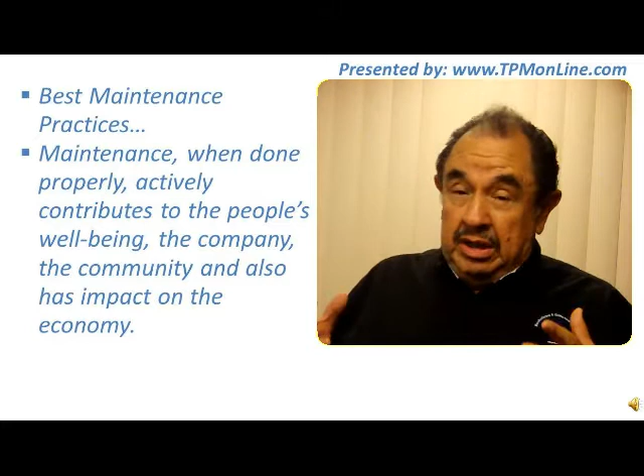Maintenance is a wonderful activity. Maintenance can be so important because it contributes to the good operation of a business, contributes to the good economy of a company, the good economy of the community, and finally the good economy of the country. So it is critical that we do a very good maintenance if we are into it.

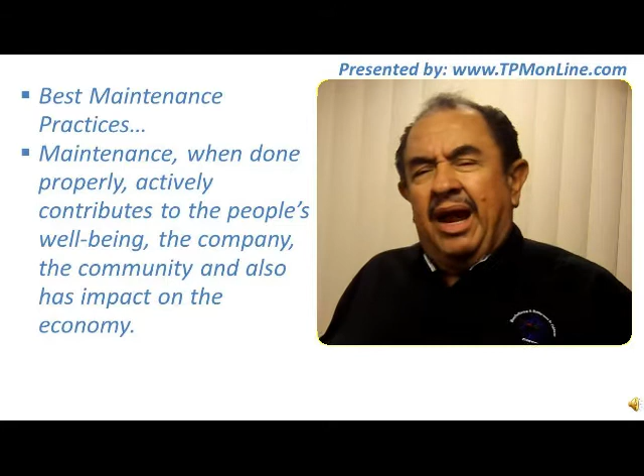Now, we will start this series of recommendations of the best practices because in reality sometimes we utilize the wrong tools, we utilize the wrong techniques, and then the results are not really so good, not as good as we would like them to be. So let us take some notes here of anything that you find that you were probably not sure or aware of.

Now, we will start with these recommendations, and I will try to be as objective as possible because the more objective I can be, the better for all of us. So let us begin with one principle in mind.

Do we really love maintenance? Do we love our profession? Because if we don't, we probably should be thinking of something else, really. Love in our job is shown by doing it right, or even better if possible, okay? Now, if we really think that this is the profession of our life, then let us do it really good. Let us do it in a very professional manner.

Now, let us be careful about our way of communicating with other people. Sometimes there is not enough quality in our communication with people. Perhaps sometimes we are not as clear when we communicate. Perhaps sometimes we're not as respectful as we should when we communicate. So this is critical. One of the first things that we need to do to be good professionals in maintenance is to have good communication skills. Let us constantly look for opportunities to improve those skills.

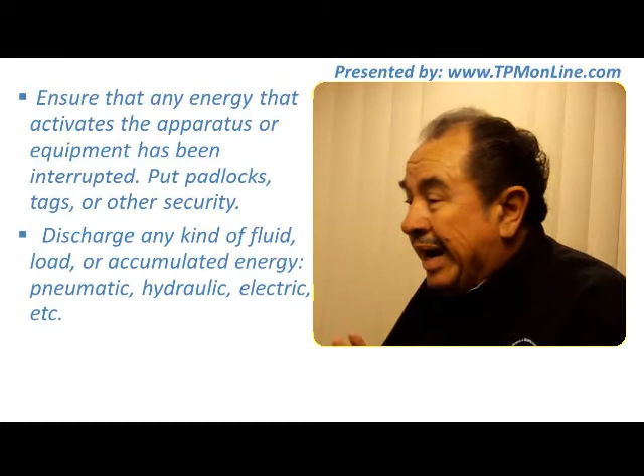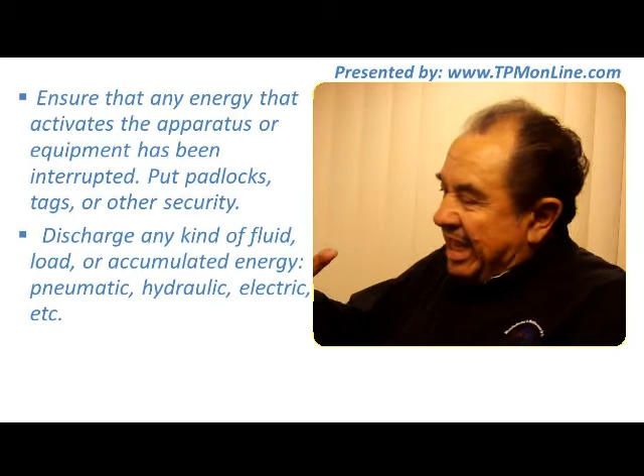So if you go to the switch and turn off the energy, make sure that you do have the lock to assure that no one else is going to start the machine. On top of that, I strongly recommend tag out as well, meaning to have a sign, a visual that tells people we are repairing this machine. Please do not energize, we're working on the motor under the machine, because sometimes that happens. People don't see you and they say, hey, who turned this machine off? Let us turn it on. Oh my God, we get bad results there.

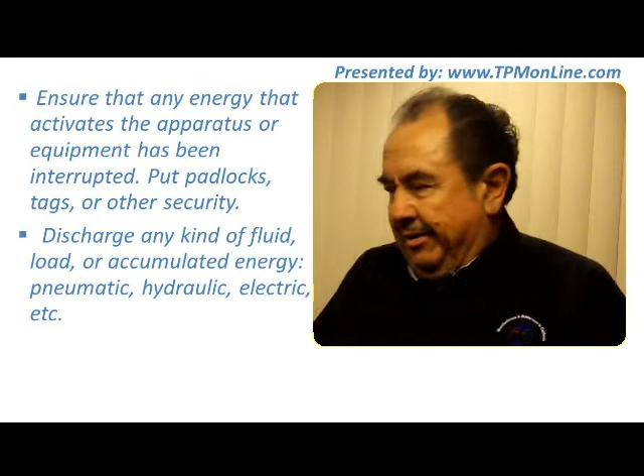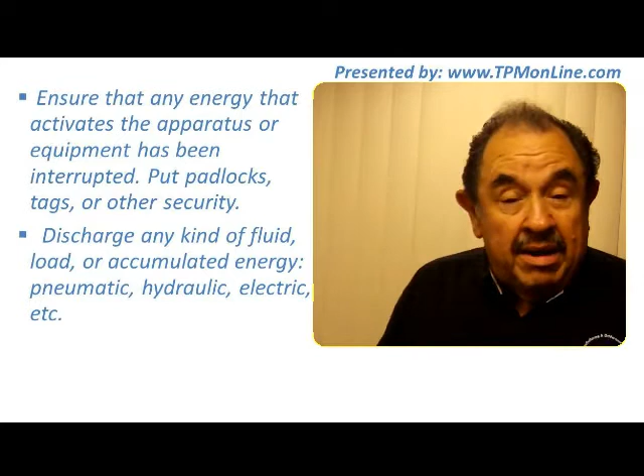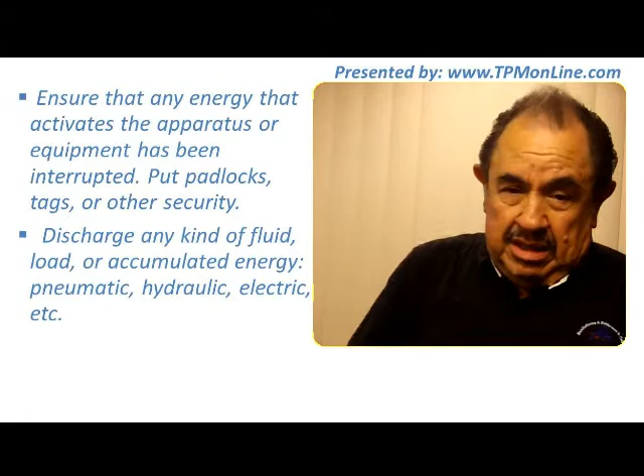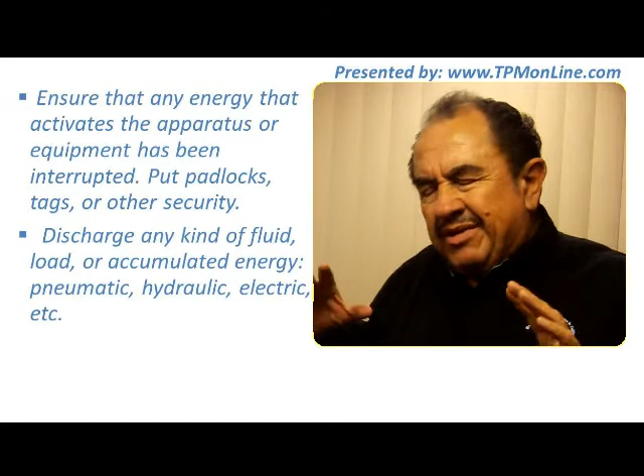So make sure also, as I was telling you, that if we have some load in the machine, make sure that you unload that machine. It can be materials, it can be some energy in the form of compressed air. Maybe if we are going to disassemble a pump, it is possible that the column of that pump is loaded. Even if it does have a check valve, make sure that you shut down that line so that the pressure of that column of liquid, any fluid that you have there, will not discharge when you disassemble your pump.

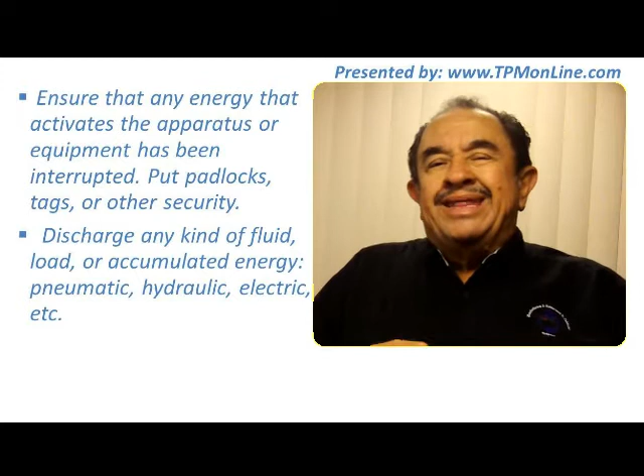Make sure that there is total safety and security when we are going to work on a piece of equipment. If there is some equipment that is being moved with pneumatic power, even if you shut down the feed of the compressed air, make sure that you activate those pistons or cylinders so that they eliminate all the accumulated energy in your machine. That is a good practice, to assure that nothing bad is going to happen.

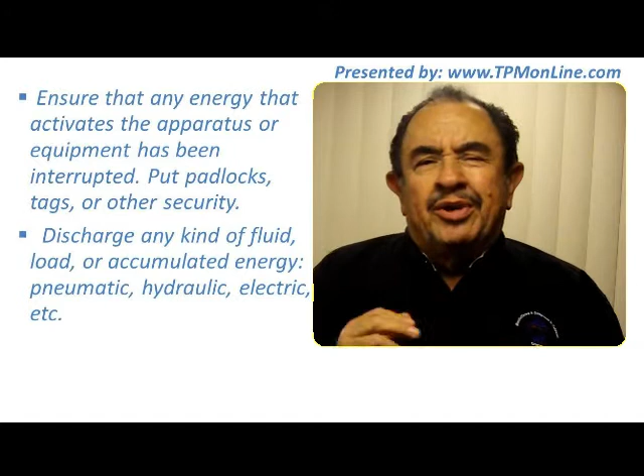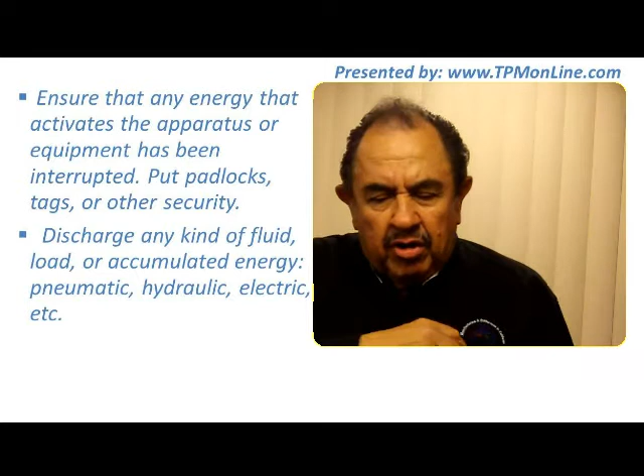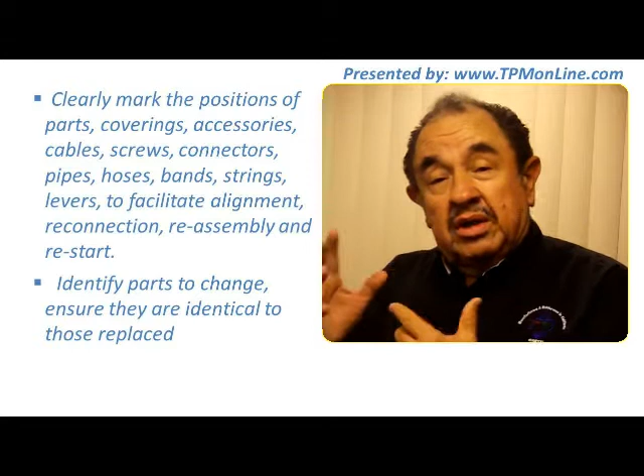Take your time. Now, once we are going to start disassembling, a very good practice is to mark. Always have handy a little marker and put a little line that shows this is the upper position of this plate. We are going to make sure that when we reassemble, this line is going to be in front of this other line. Now when you are taking apart more than one piece, I recommend paying even more attention to those conditions and positions.

I don't know how many times I have found machines that have been assembled wrong, and you probably have as well. So it is critical that we assure that we understand, and we take notes or make markings to assure that the parts are going to go back in the correct position.

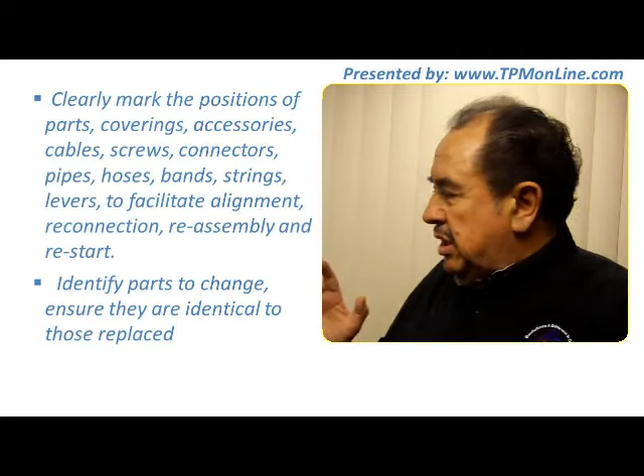Now, if you have the original diagram of the machine, if you have the drawings, make sure that when you are disassembling, you are verifying what the instructions are telling you. You will find, I am completely sure, if you haven't yet, that in some cases we discover the machine was wrongly assembled before. The machine was repaired by someone else, and there is a washer missing, there is a separator missing, there is a seal that was put backwards, etc. There are many possibilities for mistakes. You don't want to have mistakes or errors in your operation.

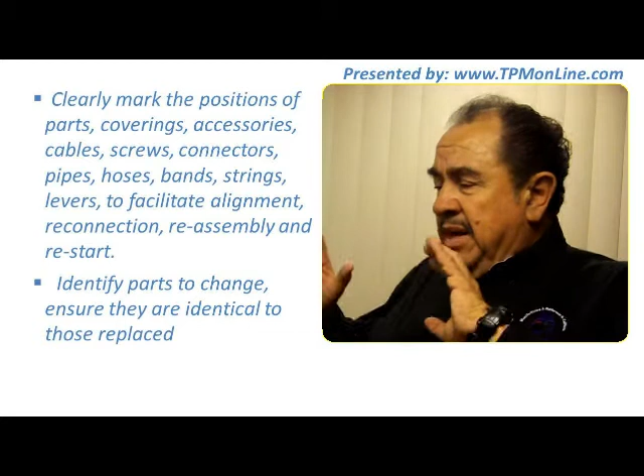So once you have done that, even the covers of your equipment, put marks on everything. Put marks on the bolts that go there. When you are going to disconnect some electric cables, also make sure that when you remove that cable, it does have an identification of the spot where you're disconnecting it from. And if it doesn't, make sure that you get one there. Put a number, make a drawing, identify the color of the cable, etc. Make sure that anyone, not only you, will be able to put that thing back together with no problem.

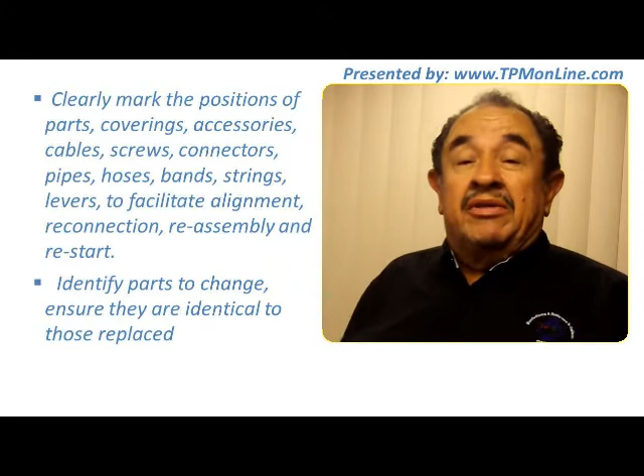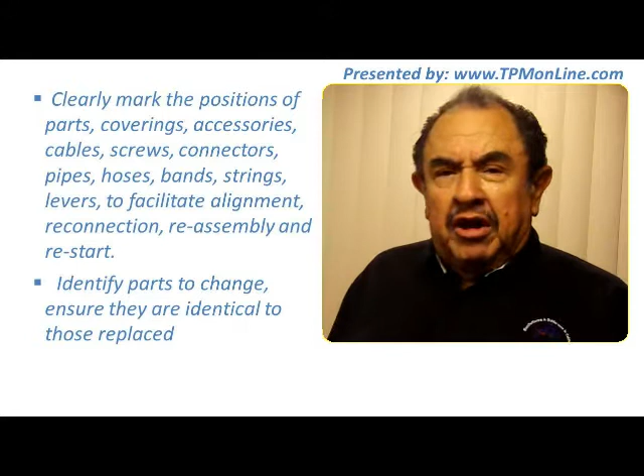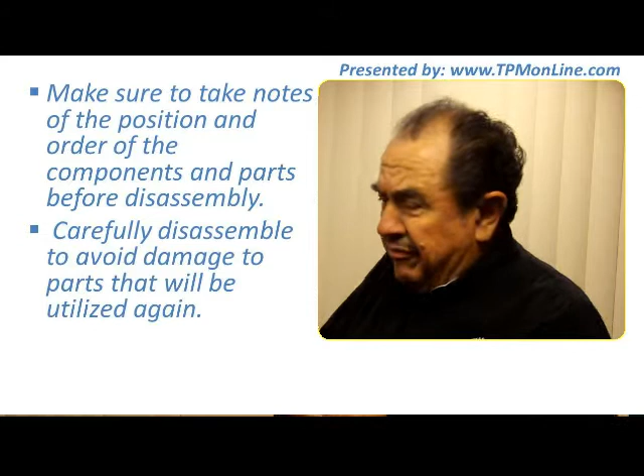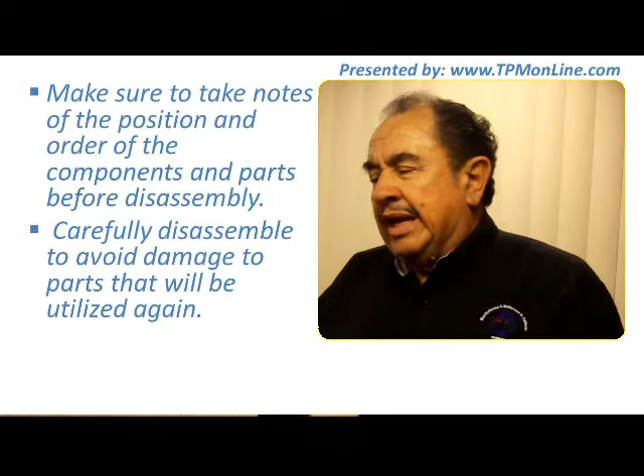Sometimes, especially when the disassembly is complicated, it is possible that you will finish your shift and you will not be the person who puts it back together. So there's a big reason for us to have those visuals and all those notes, because that way we are helping the other person who is going to reassemble to make sure that things go in the right place. Make sure we take notes, make drafts, take pictures, etc., so that everything goes back into the right place all the time.

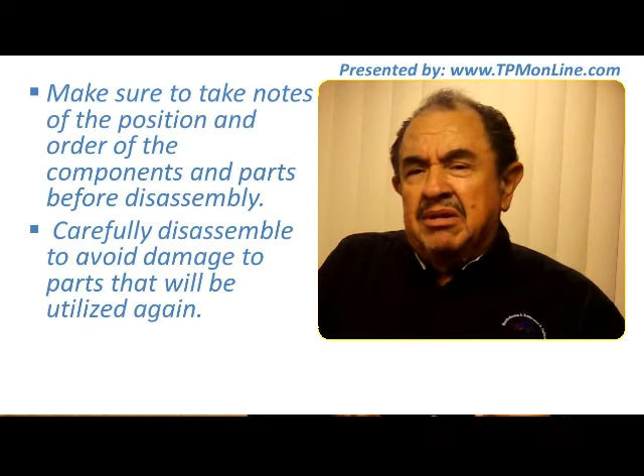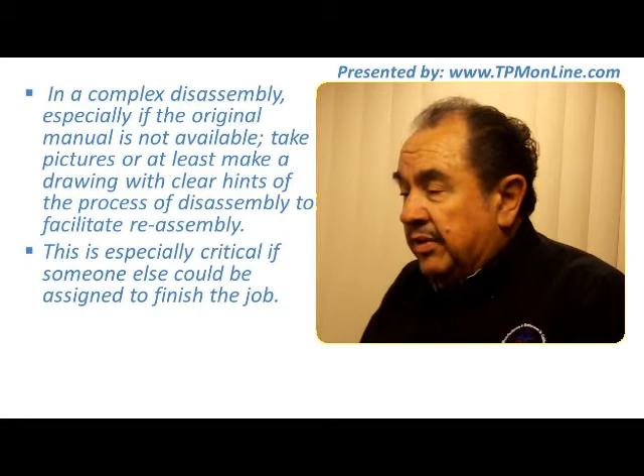Now, when we do this, it is important to keep in mind that perhaps not all those parts are going to be changed. Perhaps you are going to disassemble something that has a seal that is in perfect shape that can be reutilized. So it is critical that we disassemble carefully so that we do not cause damage to those parts that can be reutilized.

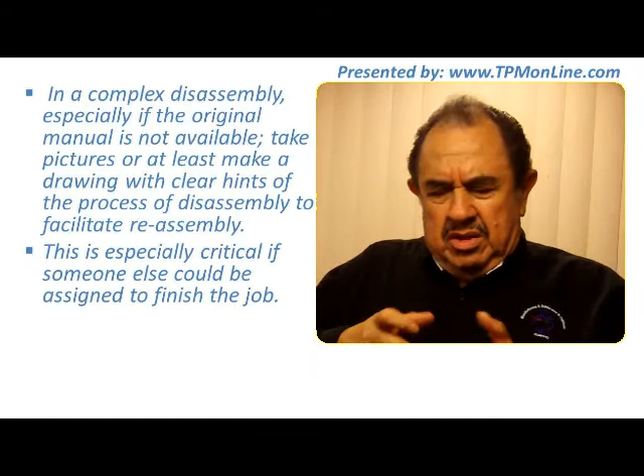On the other hand, if there are some screws or bolts that take a lot of effort - what happens to a screw, a bolt or a nut when you tighten really hard? Well, they are deformed, changed in their shape. They have this elasticity normal in all kinds of metals. So that effort that has been put into that bolt - it is not convenient to use it again.

So in those cases where you are using bolts that take a lot of effort, make sure before you start disassembling that you have the renewal parts, meaning new bolts, new nuts, especially the lock washers. Lock washers have an edge that dies the first time that you tighten. That lock washer should never be used again. It's not good anymore.

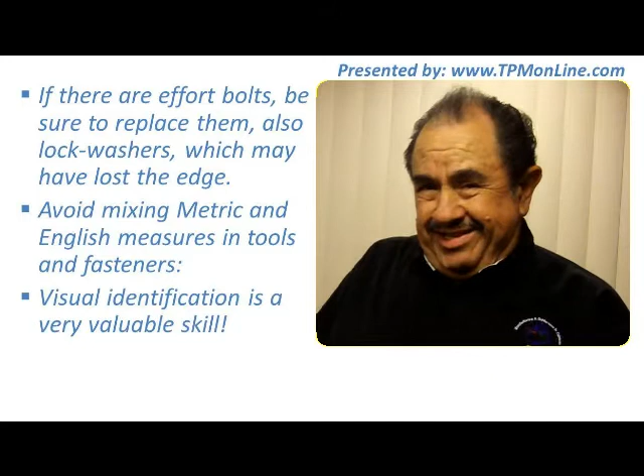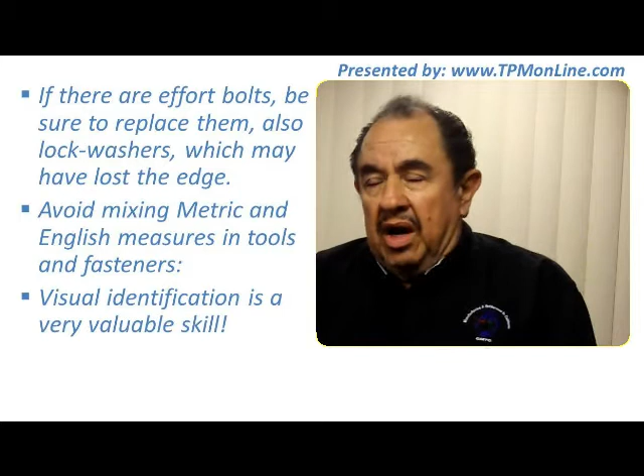On the other hand, if we're going to do mechanical work, this is very critical. We will be facing, especially today, a lot of different measurements. We have the metric system, which is the technical, professional system, and we have the English system. It shouldn't be called English anymore because England has progressed and eliminated it, but it is still used in the United States. Unfortunately, in the United States, we have lots of bad things still in place because many people have not done enough to upgrade, to learn, to implement metric systems.

Same thing with time, you know. People using 3 p.m., 4 p.m. - that shouldn't exist. We should be talking the 13 hours, the 15 hours, the 17 hours, whatever, so that way there's no confusion. But that's another thing.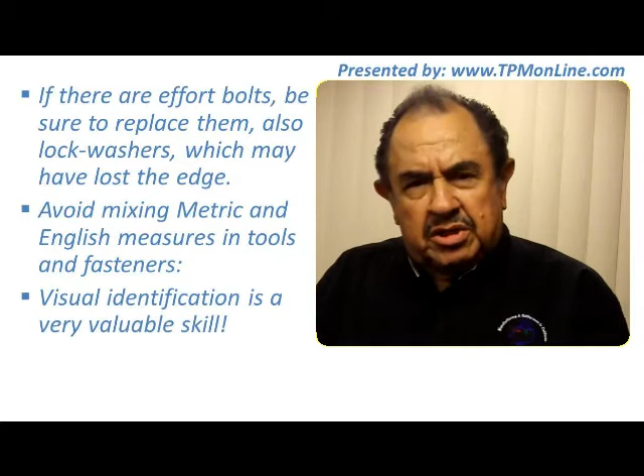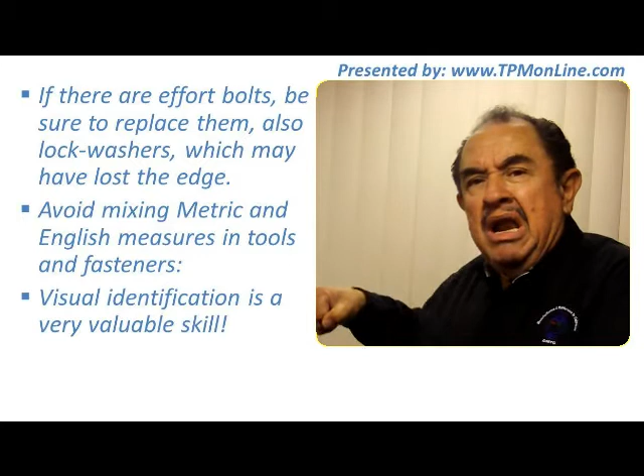Now, be careful about which torque you're going to apply to your bolts. Be sure that you have the right wrenches. Never utilize an extra pipe to make a bigger lever of that wrench, because it was not designed for that, and you're putting additional unnecessary effort on your bolts.

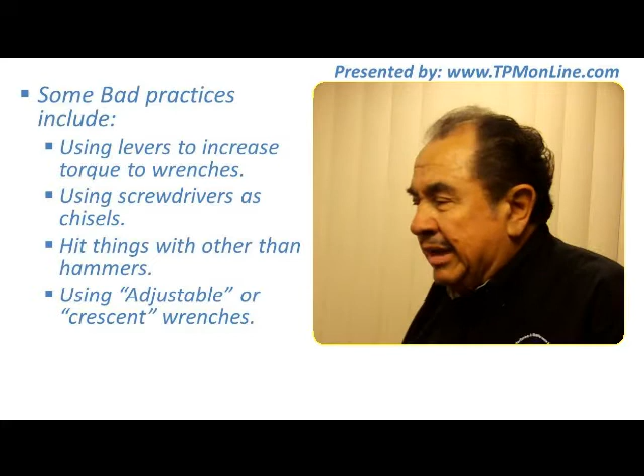One important part too is to assure that we utilize our tools correctly. I don't know how many times I have seen people using a screwdriver as a chisel. That's not good. We have seen people hammering something with something that's not a hammer, with another tool, a piece of whatever. That's not good.

So make sure that we also eliminate the usage of low-tech tools like crescent wrenches. Please, a professional will never use crescent wrenches - those are for people who don't know what they're doing. You never should be using adjustable wrenches. Use the right measurement so that you have security and safety in your operation.

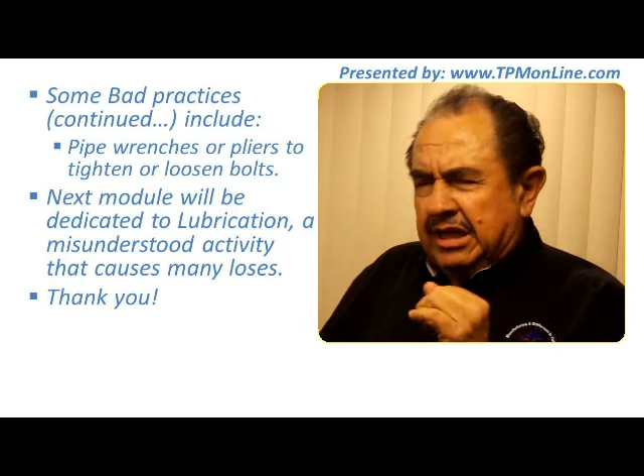On the other hand, now we are going to start paying attention to a new subject that we had not yet worked on here - that's going to be about lubrication. Lubrication and lubricants are going to be the subject of our next module, and I encourage you all to pay attention, pay special attention.